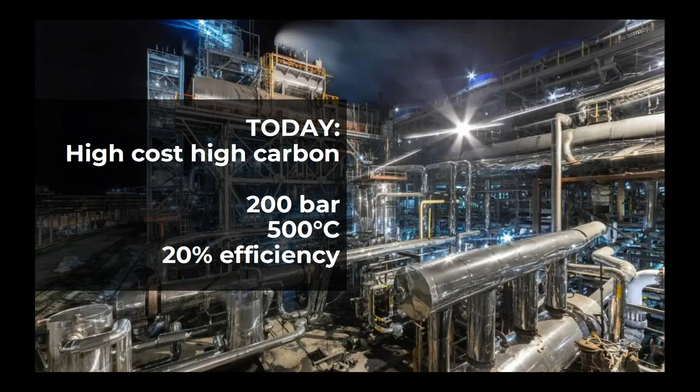But to do that, we need low-cost, low-carbon ammonia. And here's the challenge: today, ammonia is high cost, high carbon. Ammonia is produced in these massive chemical complexes at extremely high pressures and temperatures - 200 bar, 500 degrees Celsius - and a relatively low conversion efficiency of just about 20%.

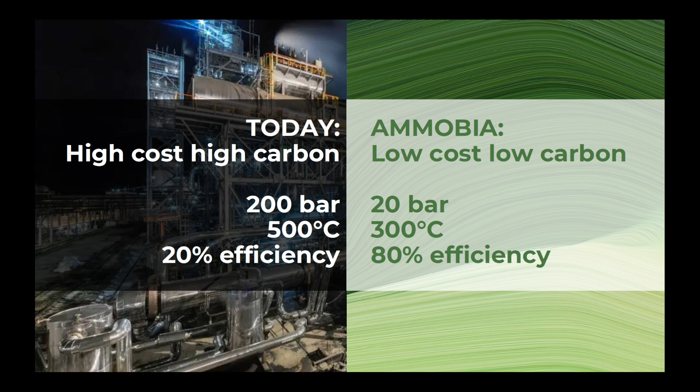Now that's where Ammobia comes in. At Ammobia, we enable low-cost, low-carbon ammonia production. We can produce ammonia at an order of magnitude lower pressure than the conventional process - 20 bar instead of 200 bar - and also significantly lower temperatures, around 300 degrees Celsius instead of the traditional 500. We do all of that while increasing the efficiency from around 20% to 80%.

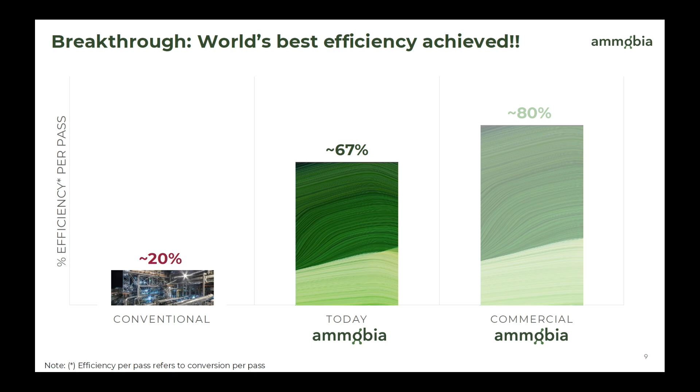I'm excited to share that in our latest reactors, we've actually achieved a big breakthrough. Our long-term goal is 80%. We've already achieved 67% conversion efficiency, which is more than 3 times the conversion efficiency within traditional Haber Bosch. So we're on a path to scale this technology and de-risk it as fast as possible.

Over the last year, we've done a 1,000x scale-up of our tech from a reactor the size of this clicker to a reactor my size.

And now we're doing another big scale-up every year to get our pilot up and running at the end of this year and have a first commercial system up in the field in 2027.

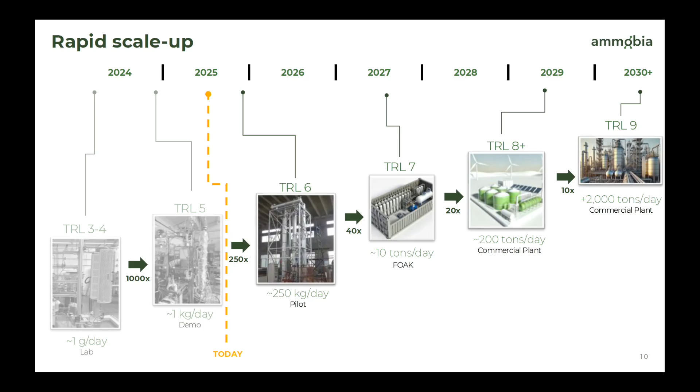The ammonia market is a massive market. If you just capture 10% of the market, you get to a very impressive revenue growth. But the better news is we already have customers lined up to achieve that revenue growth. We're negotiating our first offtake agreements for next year, and we have 5 conditional contracts with customers who want to buy our first commercial units.

The first unit will be a 10-ton-a-day system, kind of like small-scale ammonia production. First customers will be a mix between a few US projects in the US Midwest, where today ammonia is really expensive because it's far from current production in the Gulf Coast, and a second group of projects in Europe, because there's a lot of interest in distributed low-carbon ammonia production there as well.

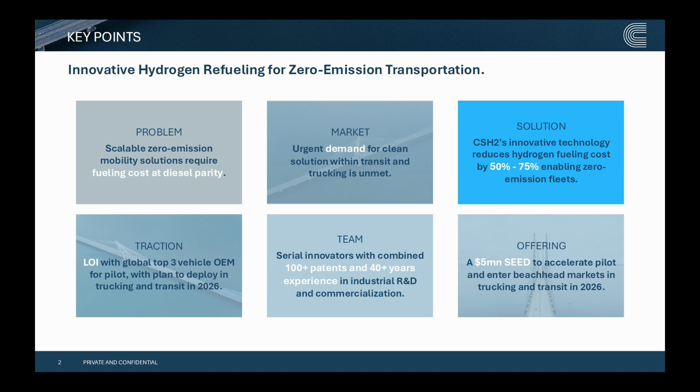And the offering, we plan to open up a seed round in the summer to generate the capital to move forward with the pilot demo and then getting into the market in 2026. So that's my overall story.

What I'd like to do is spend a few minutes to unpack those points. So let me start with why hydrogen. I think this audience is probably already convinced of that, but it's important to recognize that despite advances in battery chemistry and technology and megawatt charging, you still really run into infrastructure problems when you try to scale batteries.

It's things like power outages, the risk of being able to build out grid interconnects in the right amount of time, competing demand from data centers. Those are things that really give pause. There are a lot of people working on innovation in that space, but those are hurdles that need to be overcome if you want to envision an all-battery electric heavy-duty fleet.

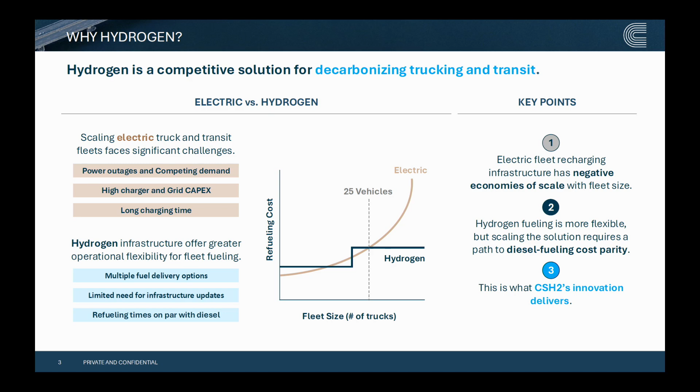Hydrogen, though, has different scaling characteristics, and so it's our view that you can have a very complementary blend of electric and hydrogen. The problem, though, is that hydrogen stations today are too expensive and very inflexible, and that's the problem we're trying to solve.

The rest of it is actually used to capture venting losses and boil-off losses that occur along the way. You don't really need that, except for the fact that if you don't have it, you end up losing so much hydrogen that the economics look even worse than they might be with today's technology. So what we're trying to do ultimately is simplify that technology.

If you can get rid of those, you can eliminate 60% of that station. You can simplify the station, which drives down your CapEx and your OpEx, and then you're on your way down that cost curve, with the potential to really improve the economics. Along the way, you get not only the economics, but efficiency and reliability because you have less equipment, and you also get scalability because you have a smaller station that can start with small fleets and grow into it, rather than overbuilding a station on day one and paying penalties where your station is designed for 200 vehicles, but if you're fueling, say, 30, you end up carrying all that CapEx and fixed costs over too few units of fuel, so you pay a double penalty on that.

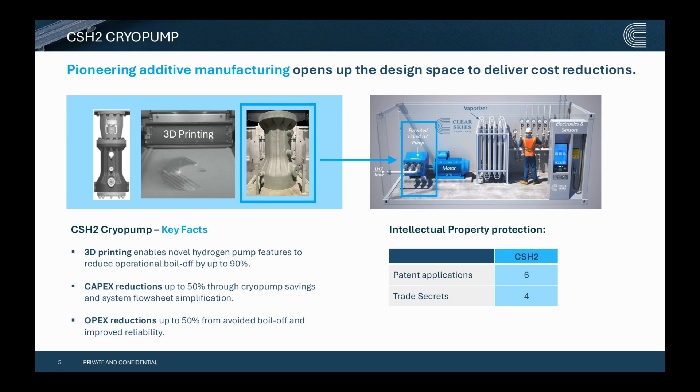Since my co-founder and I both come from industry careers, we understand the value of intellectual property, so we have a deliberate plan to protect it, including 6 patent applications to build a moat, as well as trade secrets around design and operation, which you don't want to patent because those are the secret sauce that really allow you to be differentiated and maintain long-term capability.

When you roll all of that up, what you end up with are mobile refiller modules. What you're looking at here is an artist depiction of a 20 by 10 foot container - that's the station in a box, so it's a much smaller footprint. It's containerized, so if you've got a transit agency starting off with an ultimate fleet of, say, 100 buses, but they only have 10 buses on day one, you can begin with a starter kit and grow into that over time rather than overbuilding your station entirely.

In terms of progress, we've been at this for a bit of time with some early investment from Breakthrough Energy and Mercator Partners. We spent 12 months developing the design and a full-scale prototype, including work here - this took us about 8 iterations to get the printing correct. We are now in the field working through validation, and we expect to have first hydrogen fills within the next couple weeks.

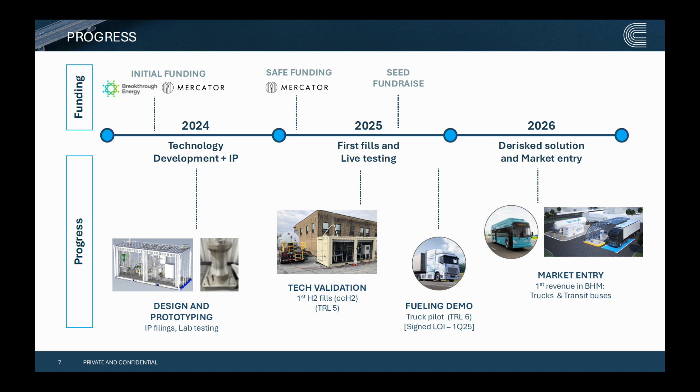On the back of that, we're working with the vehicle OEM I mentioned at the beginning of the presentation to work out the details for a truck filling demo. That demo would involve filling trucks every day, every night, for several weeks. The idea is to get performance data over an extended period, so a transit agency, drayage fleet, or local operator can have confidence that this can actually work reliably. That's what you need to unlock the market, which is what we're trying to do in 2026.

It's a super aggressive schedule. Not one that I think is particularly sane, but it's one we're trying to move forward with. So that's our story. Happy to answer questions, and happy to have you come lift the dumbbell here if you want. Thank you for your attention.

Question: I think it's a general perception that 3D printing as a manufacturing technology is more expensive than more conventional solutions. Do you see any significant cost reduction potential with the process that you're using?

So the short answer is yes. This thing looks heavy and solid, but it's about half the size of the next smallest pump. There are other pumps out there that are about the size of me - actually 7 feet tall is one of the ones out there. So that's one thing, just being able to shrink the size of the material.

The second thing is, because we're building in vacuum chambers, this is a single printed component that took about 48 hours to print. If you made this traditionally, you'd end up with probably 30 components, something much more expensive, a lot of welds, and your thermal insulation wouldn't be anywhere near as good. So there are niche cases where you can use these specific capabilities intelligently, and that's something we've done.

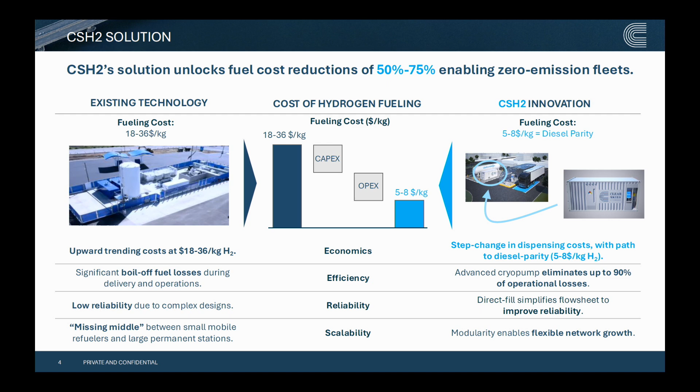If Plug Power is offering you $9 to $10 per kilogram, you're already above diesel parity, so there's a problem. As you scale up, you can do direct contracts with industrial gas companies and start to negotiate that down. You can also activate growth of the market over time to get scaling effects that squeeze the entire cost stack.

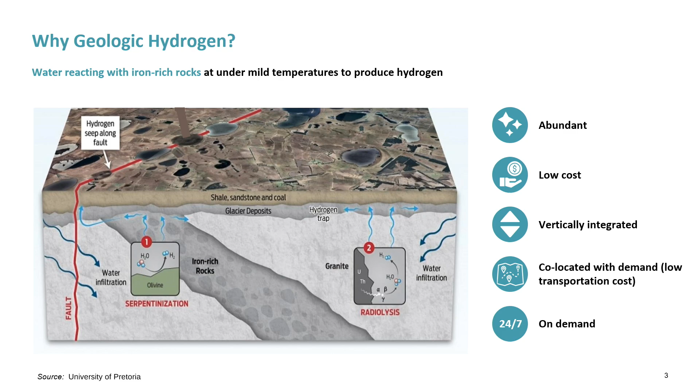Regardless of how it's produced, what we do know is that current projections of how much is produced annually—if we could tap just 1% of that, it would give us about 200 years of abundant, low-cost, on-demand hydrogen. And that's really exciting.

Focusing on probably the most important metric, the cost aspect, we currently have a TEA, which is actually public online—everyone can go see it. It's the culmination of over 150 interviews with hydrogen producers, customers, natural gas well operators, a lot of people. The big takeaway, two big takeaways: one, natural hydrogen can be produced for about $0.50 a kilogram; stimulated, which is the injection of water into these resource rocks to produce it, would be about double that, $1 per kilogram. The second is, of course, this doesn't include transport.

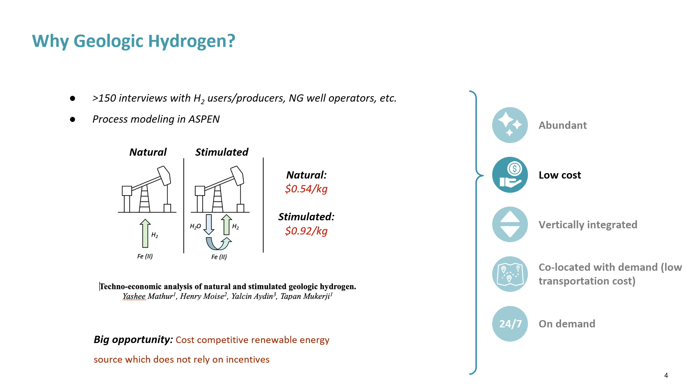The main thing we want to show is that transport is obviously very important, and we want to be able to co-locate these sources next to off-takers. But the biggest opportunity we see from this is that theoretically it's cost competitive without incentives or co-product utilization, like other companies will have to rely on.

Let's talk about some of the people who work in this space. There are a lot of companies right now, and a lot of them are doing great work. The challenge, however, is that most of them rely on historic, legacy well data. One company, for instance, HyTerra, is doing some really exciting stuff in this field. They recently had a press release a few weeks ago—they measured 96% at one of their well sites. It's very exciting, but not that surprising since they're drilling next to a well which already had measured these high hydrogen concentrations. That's not to bash what they're doing; I think what they're doing is great.

It's really just to drive home this message that we don't really know how to find these sites once we've run out of these legacy wells to drill near. And that's what Hydrify wants to work on. So once we run out of these sites, we'll have to resort to wildcatting, which will have very low success rates. And if we use natural gas as a proxy system, you can assume about 5 to 10% success rate when you're actually going out trying to find these sites.

So when you incorporate this, you can spend about $20 to $40 million just for a single viable well when you're doing natural hydrogen. Hydrify, of course, wants to reduce these numbers, and we think we can get it down to about an order of magnitude less, about $2 to $4 million per well. And we want to use our algorithm, which currently, in its current state, can achieve about 50% success rate. We'll talk about it in a little bit—actually this summer, we hope to refine this number even more.

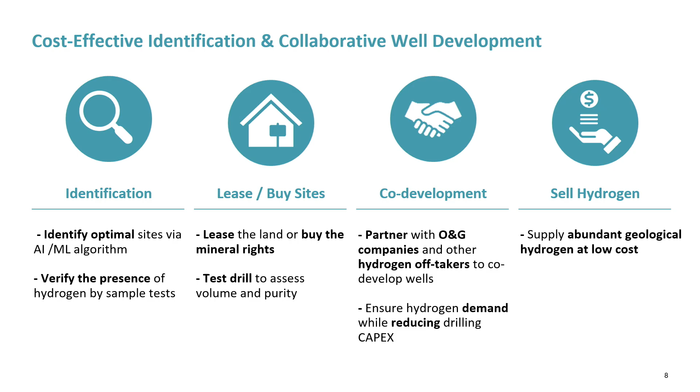Assuming we find the high hydrogen purities that we want, we'll play to our strength and partner with oil and gas companies, hydrogen off-takers, and move from there, because the ideal scenario is to sell hydrogen at low cost and abundance. So we're very interested in partnerships, and with that, I'll leave it up to questions, and thank you for your attention.

I have a question. What is an economically viable hydrogen well? What does that look like? Yeah, let's go back a little bit. Economically viable well means it's producing at $1 per kilogram or less. So we looked at several parameters. Of course, it's a TEA, so it's only as accurate as the inputs you put in. But we base it off of success rate, percent of serpentinization that you can achieve, and distance traveled. So we see $1 per kilogram or less as an economically viable well.

Other questions? Do you plan to lease land without informing any of the big oil and gas majors that this is where natural hydrogen is? Because they would have the capacity to just lease the land and take over it. Right, so right now we're taking advantage of the fact that although oil and gas companies are aware of this, they're not all that interested in it at the moment. So we're going to look for federal lands, BLM lands, and the idea is that if we find these lands, we'll be able to lease them before we release any news about what we find there. That would be the main idea. Yes.

Okay, so I guess most hydrogen that is used today is—is 'reforming hydrogen' the right word? Yeah, okay. What's the delta in price? Because you were saying $1 per kilogram, so what are you beating out? Right, so depending where you are, reforming hydrogen can be anywhere from $1 to $1.50. So when we say we're doing it for about half of that, of course, that's assuming we're not having to transport it off—that's a big thing. So they bring in natural gas and use it on site, so it's probably the key differentiator there. But just for the production at the well, 99+% purity hydrogen, we can do it for about $1 or half a dollar per kilogram.

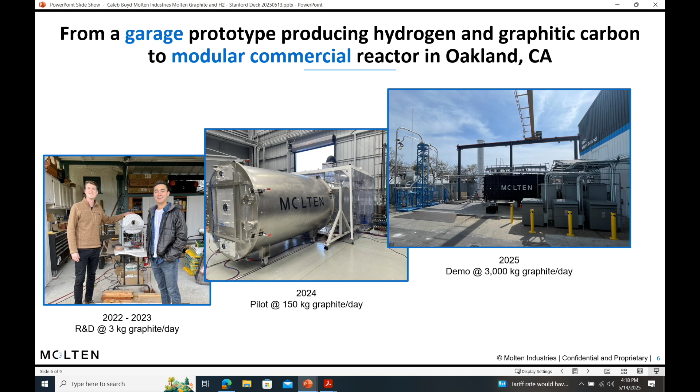We were also backed initially by Union Square Ventures and 50 Years, two amazing funds. Since then, last year, we raised a Series A funding round from Breakthrough Energy Ventures, and we're currently using that to scale up to a modular commercial scale. That's the photo on the very right. That black container module produces 1 ton of hydrogen and 3 tons of graphite a day. We're currently commissioning that unit now, and then looking to site a full-scale commercial plant, which would be 20 of those commercial modular units.

Can't say how much we really are thankful for all the employees that have made this a possibility today. We work with an amazing team, everyone is engineers and technicians. These guys are incredible, the amount of stuff that they are able to build in a short period of time is fantastic. I really want to thank the team and highlight that.

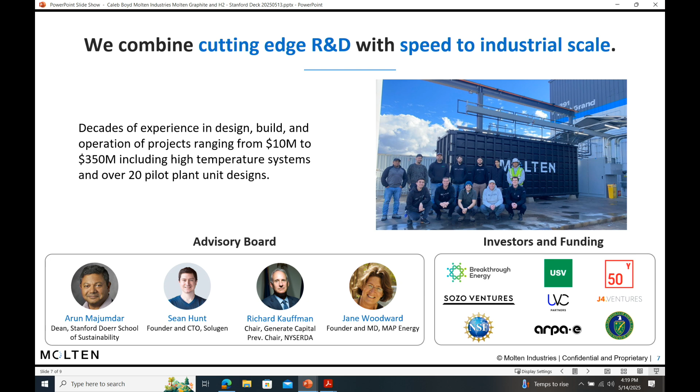We've also got an amazing advisory board, people from the Stanford ecosystem, Arun and Jane specifically. I'm sure many of you guys know them, just huge supporters to almost every company that I know of that's come out of this ecosystem has really benefited from their support. And the investors and funding that we've talked about has been incredibly useful as well.

This is where we're looking to go. So I mentioned that gigafactory, we call it a gigafactory because 20 of those modular units produce enough for 10 gigawatt hours of batteries per year. That's what we're looking to site right now, start construction mid to late 2026, and have commissioning in late 2027, early 2028. So thank you, and I'll open it up for questions.

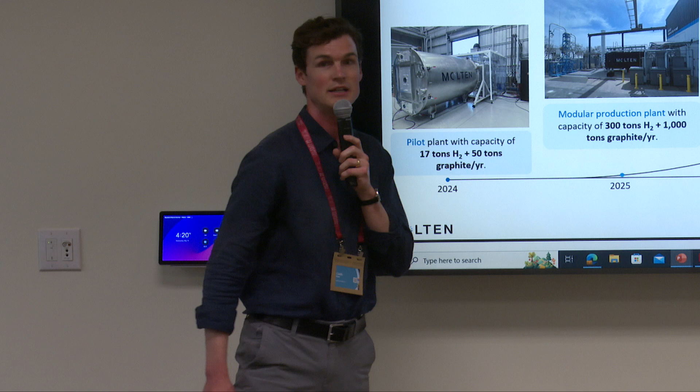On the current scale, what is the cost of hydrogen we're seeing without including the selling price of graphite? At this scale, this modular production plant right now in Oakland, it's really expensive. We pay something like $15 per million BTU of natural gas, and at peak we're paying around 50 cents a kilowatt hour of electricity. Stuff is expensive in Oakland, so the hydrogen here is very expensive. At this first gigafactory, we're looking to sell that hydrogen between $1 to $1.50 per kilogram, and at full scale, we think we can get to below $1 per kilogram.

We talked earlier about hydrogen today coming mainly from natural gas through steam methane reforming, which costs around $1 a kilogram, not necessarily counting depreciated capex. With depreciated plants, you can potentially get lower than $1 a kilogram. If you start to look at actually replacing natural gas, for example in a DRI shaft furnace to make clean steel, you need about 70 cents a kilogram to be economical with existing DRI shaft furnaces. And if you're looking to replace natural gas on just a per million BTU basis, like straight heating natural gas going into a burner, you need about 50 cents a kilogram hydrogen cost. Those are the prices we would love to target in the long term, but that's difficult to do.

What's the carbon intensity of the hydrogen at the end of the process? Yeah, good question. It depends on how you count it.

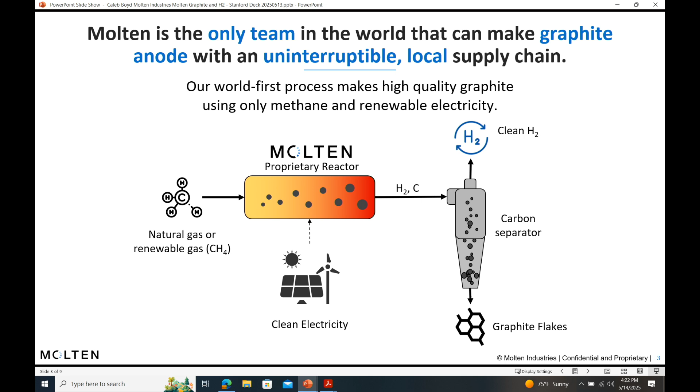The primary source of emissions in our process is upstream methane emissions. If we're using clean electricity, our process itself generates no CO2 emissions. Natural gas has upstream methane leaks, so that's the primary source of emissions in our process. If you push all those emissions to the hydrogen, you're looking at around 1 to 1.5 kilograms of CO2 per kilogram of hydrogen if you're using 100% renewable electricity.

The interesting thing is that if you look at, for example, the 45V tax credit, which may or may not exist shortly, the graphite flakes that we produce are much lower carbon intensity than the way graphite's made today. That's primarily because you're doing either strip mining or this process at 3,000 Celsius, which has a ton of NOx and SOx and methane emissions as well. And you actually get a credit for that.

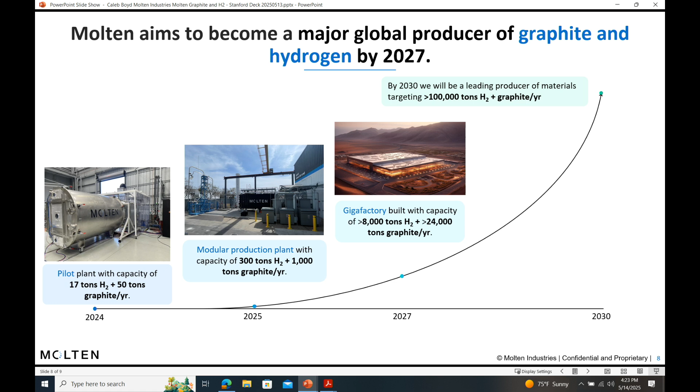From the 45V tax credit standpoint, the way it's written today, we're actually eligible for the $3 per kilogram credit because of that co-product allocation. As it's written right now in the reconciliation bill, 45V would still exist if we just start this facility construction in 2025. So you can either look at that as a bad thing, or maybe we just need to raise funding sooner and start facility construction sooner.

Are there any entities that could be off-takers for both the hydrogen as well as the graphite, since natural gas pipelines are everywhere, so why not move it around? Yeah, that's a good question.

Some entities have been interested in that, like steel companies use graphite for anodes for electric arc furnaces. They would also be interested in using hydrogen. The graphite we make, which is basically a powder, these flakes, hasn't been shown to work in steel electrodes yet—it would be like a research project. Most battery companies don't use large quantities of hydrogen, so we've been seeing this as two different end customer processes. If we're making electricity, then we could supply electricity to those battery companies with the hydrogen. It's just a low value use case for the hydrogen, but yeah.

So in the color spectrum of hydrogen? Technically, it's turquoise hydrogen. It's basically blue. You can think about it as like we're taking a fossil fuel, and instead of having to dump CO2 into the ground, we sequester that as graphite. Most people don't burn their batteries intentionally, so the graphite is sequestered most of the time.

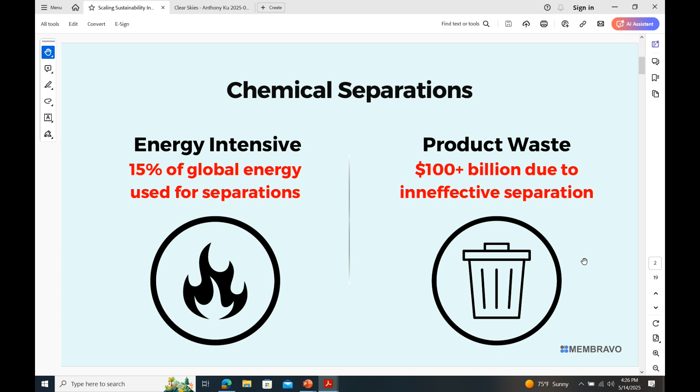At the same time, chemical separations alone are the source of a tremendous amount of energy and product waste in the industry. 15% of global energy and emissions goes to just taking mixtures of molecules and separating them. It's remarkable. Hundreds of billions of dollars of product that we've made go to waste because they can't be separated from the stuff they're mixed with due to ineffective separation technologies.

So I'll give you an example with this nice little cartoon. Tens of billions of dollars of hydrogen go to waste every year because existing technologies are not durable enough to separate that hydrogen from high temperature, harsh gas mixtures that exist in the industry. Therefore, companies have no choice but to burn that gas. This has been taking place for decades, and there's not much to do about it.

We solve this problem by simply recovering hydrogen out of those waste mixtures, allowing that value to be brought back into the asset, reducing emissions and reducing cost. We actually work in a variety of different applications across industries, but today we're gonna talk mostly about hydrogen.

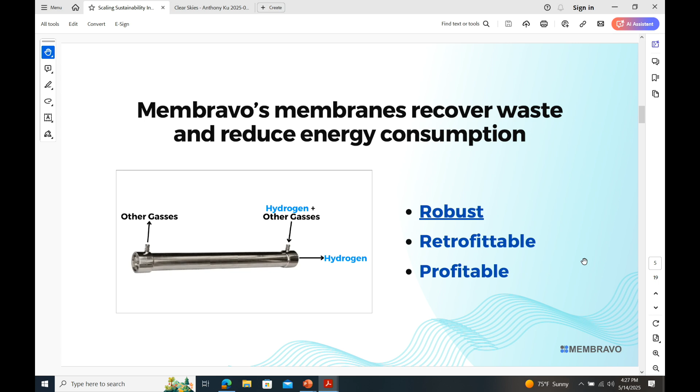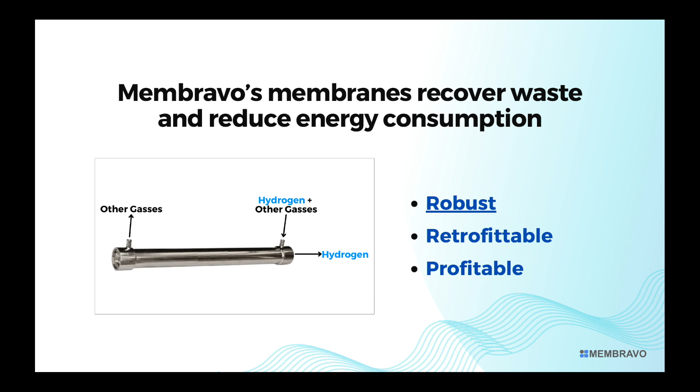Our membranes work like filters. They allow hydrogen to pass through and they block other gases. Unlike existing hydrogen separation technologies, ours is designed and field tested specifically to work in the most extreme industrial environments. Our product also works for our customers because it's easily retrofittable into existing assets, and it's profitable for them to use, so there's no need for subsidies or incentives.

Again, my name is Joe Sawa. I'm the co-founder and CEO of Membravo. I spent more than a decade at Shell working in oil and gas and hydrogen, and I started Membravo to help decarbonize industries exactly like those. My co-founder Milad Yavari is a PhD in membrane technology, and he led the development of our technology at SRI, and we joined forces to bring this technology to market very quickly and very effectively.

We just got started. We launched the company in January 2025 when we spun out from SRI. We have manufacturing and headquarters in Menlo Park. To date, we've raised $250,000, and we've joined a couple exciting accelerators, Third Derivative and Plug and Play. We just heard, just yesterday actually, that we've been accepted to an amazing program, an amazing accelerator. I can't share what that is yet, but stay tuned.

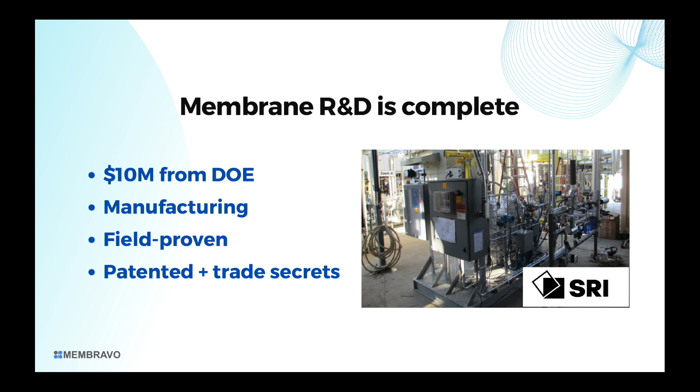More than $10 million of U.S. Department of Energy funding went into the development of our technology at SRI, which, by the way, used to be called Stanford Research Institute, right down the street in Menlo Park, where they perfected the manufacturing process for this technology, and they also field tested the technology at third-party locations, including the National Carbon Capture Center, where our membrane separated hydrogen from high-temperature syngas, which is a really challenging industrial separation, and it's also how 99% of hydrogen is made today. The technology is patented, and there are additional trade secrets and confidential know-how that ensure that the tech can't be reverse engineered.

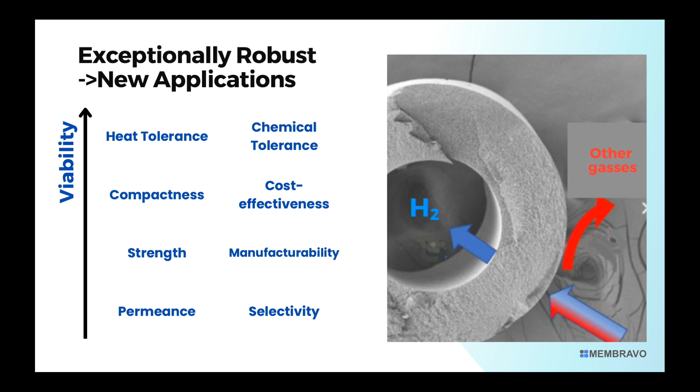Our membranes are exceptionally robust, which means that they work in applications where other technologies don't. We can capture value, we can reduce waste in these new applications. Typically, we see, coming out of R&D, that researchers are looking for materials and membranes that have high permeance and selectivity, but then they have to prove that the materials are strong and manufacturable. Then they have to make sure that they're compact and cost-effective, and sometimes those materials get commercialized, and that's what we see in industry today. But they're really lacking the top part, which is the heat tolerance and the chemical tolerance, which means that their applicability in all the variety of industries where hydrogen separation is needed is very limited. There's just a lot of applications that can't be served, a lot of unaddressed need with this technology.

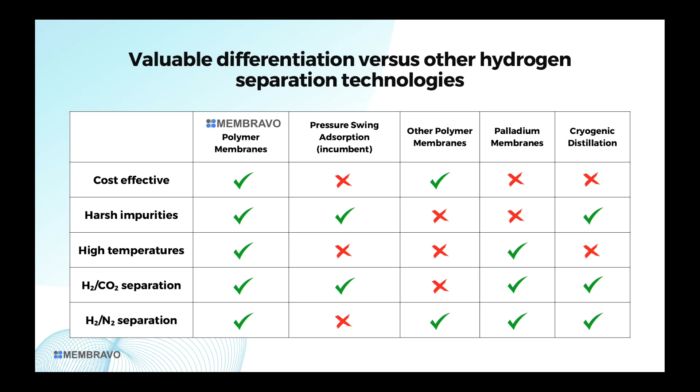If we scan the landscape between pressure swing adsorption, these are competitive technologies. Pressure swing adsorption is the incumbent technology. There are other polymer membranes as well as palladium membranes and cryogenic distillation, but it's really the combination of the cost effectiveness, the resilience to impurities and temperature, and the ability just to get the job done, to do the separation that's needed between hydrogen and other gases. We're critically positioned to serve lots of these unserved markets because of the shortcomings in the existing technologies and the strengths of ours. So our membranes add value in really a wide range of applications.

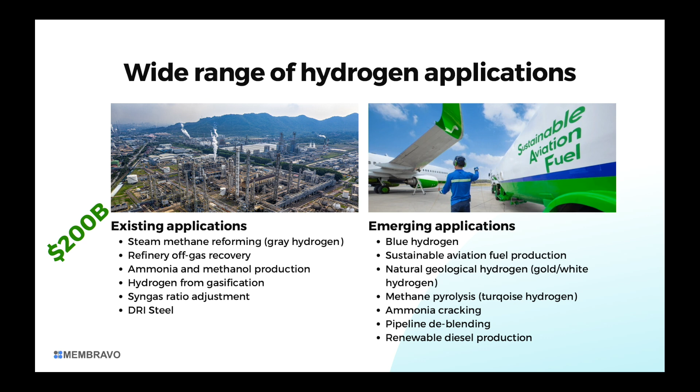Those are in industry today, in refineries, chemical plants, and DRI steel mills especially. $200 billion worth of hydrogen is used every year today, and tens of billions go to waste. We're also looking at the exciting emerging applications that we're hearing about today, where there's new ways of producing, consuming, transporting, and storing hydrogen. Many of them can be made more efficient through better separation. So that's blue hydrogen, methane pyrolysis, natural hydrogen, ammonia cracking, renewable diesel production, sustainable aviation fuel production. It's really a long list. Virtually everywhere that hydrogen is produced, consumed, stored, or transported, we're finding value from these membranes.

Just a quick example: gray hydrogen or blue hydrogen is made from steam methane reforming today. It's separated via technology called pressure swing adsorption, but about 20% of hydrogen goes to waste just due to the ineffective nature of that separation technology. By retrofitting our membranes onto that unit, we can simply capture hydrogen that's coming out of that waste stream, recycle it back into the process, and thereby increase production of that process by 20% with no change to the inputs, no change to the fossil fuel inputs. So that's an improvement in efficiency, reduction of carbon emissions, and obviously a big boost to the economics for that project or for that asset.

Briefly, looking beyond hydrogen, we do serve other markets that deal with high temperatures and harsh chemical mixtures. In fact, our first customer—we shipped product and received revenue from our first customer a couple months after spinning out—was in the semiconductor industry. That's a liquid separation we're currently piloting.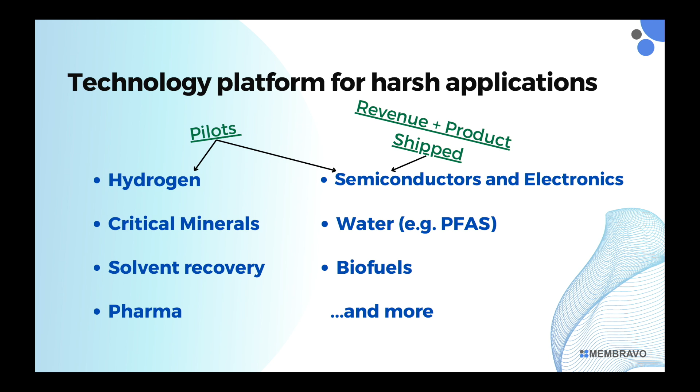But really, hydrogen has been the largest interest we've gathered thus far. There are lots of other applications to explore going forward as well, in parallel.

So we're here at the bottom, doing small-scale pilots with our first paying customer. Through the rest of 2025, we'll be scaling up our product to build larger modules. Going into the end of 2025 and start of 2026, we'll begin pilot testing with our first customer. After that pilot test is complete, we expect commercial purchase orders, and then our challenge becomes scaling up to meet the demand we've generated.

We're currently raising a $2 million pre-seed round to prepare for and start executing those pilot projects. That means hiring our core team and engineering that commercial-scale product. We're extremely confident in our technology, product, and business overall, even in this environment and landscape, because we have strong unit economics today that work in any policy scenario, and we have a very short path to profitability and scale-up.

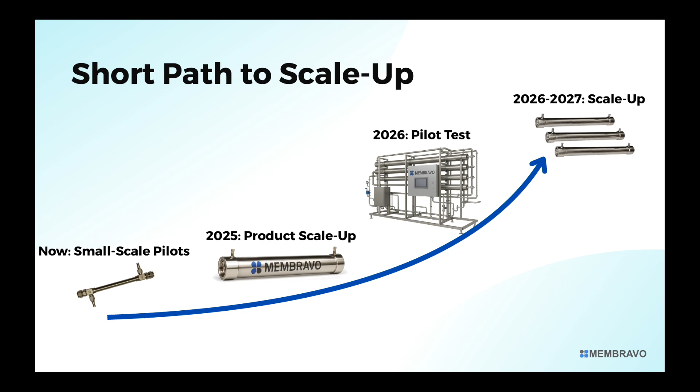Sure, so our minimum commercial scale that we're talking about is nominally 200 kilograms per day capacity, about 3 feet long and 4 inches in diameter. There's no reason we can't go bigger in the future, but that's what we're calling minimum. We can manufacture at that scale and build more units, putting them in parallel to get more throughput based on the customer system. Long term, we can always make that bigger and get more throughput as well.

Could you replace the pressure swing adsorption unit altogether? It depends on the process. We envision a few different scenarios. In some cases, we can replace the PSA.

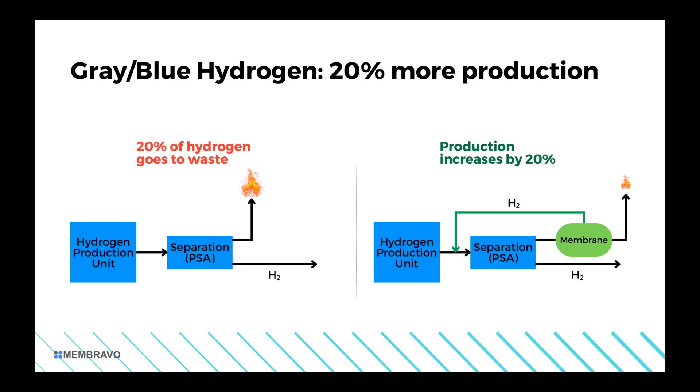In many cases, like I showed here, we actually work really well as a hybrid system. A PSA today achieves really high purity, meeting the customer's requirements fairly well, but with low recovery. This 20% loss is incredibly high. By making a hybrid system, PSA plus membranes, we can keep that high purity but also boost that recovery to something much more reasonable. In some cases we could replace it entirely, but the hybrid system makes sense a lot of times.

That's great for us because there are many, many units that need retrofits. We don't have to tear out the old unit and put in a new one, we can just complement what's already there.

How does your pricing compare to competitors? We are in the same price range as existing competitors that have less durable technology. We're in the same ballpark, nothing out of the ordinary for customers, but they can use this product in places where they can't use other technologies.

I'm curious if this has good application for electrolysis and wet hydrogen, like separating gas and liquid, or is it mostly for gas separation? We are seeing a little bit less traction in that space, to be totally honest. It's sort of already solved, and deoxy units are there to remove trace impurities. The industry seems fairly happy with the solutions that are there, so I'll never say never, but we're not looking there first.

All right, thank you so much.

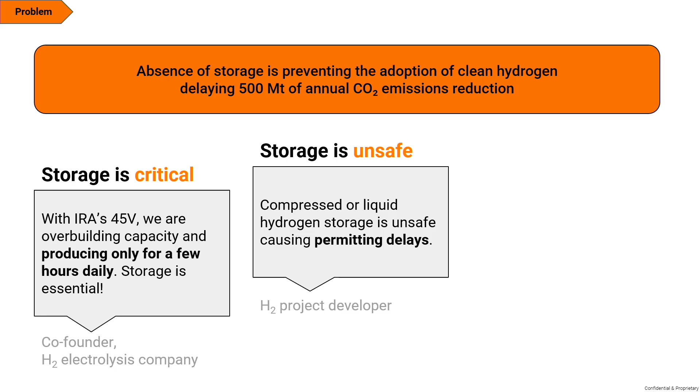Secondly, with hydrogen storage, we talked a bit about off-gassing earlier, and there's also a perception around storing hydrogen in compressed form, which causes a lot of permitting delays. So safety is an important factor. And lastly, it is expensive.

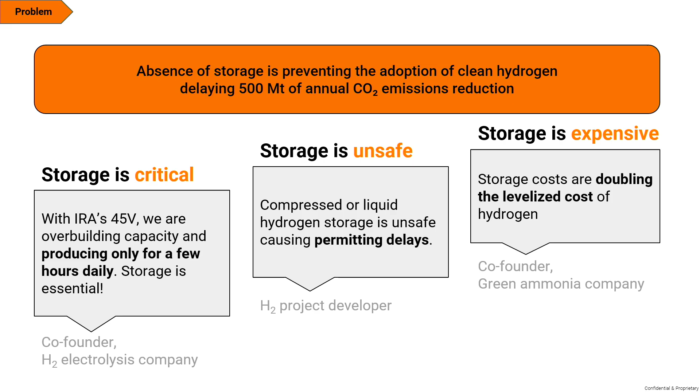In many cases, hydrogen storage is as expensive or even more expensive than the cost of production itself, in the range of $3 to $5 per kg, which is ridiculous. When you look at the overall cost of either green or low carbon hydrogen production, many of these projects become unviable. We started early last year through a Stanford Climate Ventures class.

I am Suhani, a second year MBA student, and after speaking to almost 200 people in the industry, we realized there are two different types of storage needs: one is buffer, and the other is backup.

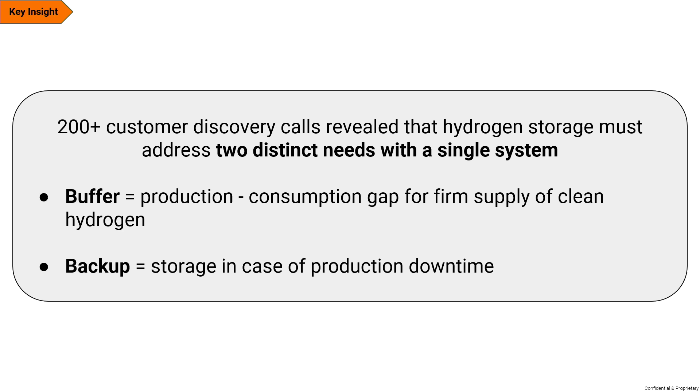Just for context, when you look at battery-based storage for electrons, there's long duration storage with a different chemistry, and short duration storage. It's the same with hydrogen. On a daily basis, you need buffering if you're using green hydrogen production, and you also need backup in case your production unit isn't working for a few days, similar to power backups, where you need infrequent charging and discharging of hydrogen solutions.

So we looked at various different solutions and came across metal hydrides, a technology that has been researched for almost 20 years by the Department of Energy, with billions of dollars spent on research, producing a lot of good material. Incidentally, my mother had also worked on this technology about 10 years ago and had commercialized a plant in India.

But having said that, why did this technology not scale, and why do we only see compressed or cryogenic storage so far? It's because a lot of people were trying to use this technology for mobility and transportation applications. And by logic, metals are heavy and they add to the weight and reduce the efficiency overall.

So despite being significantly safer because hydrogen is stored at almost room temperature and pressure, the OPEX is really low. It's almost like a hydride gets formed and you don't need to maintain anything. It can stay like that for long durations, and has probably one of the best volumetric storage capacities.

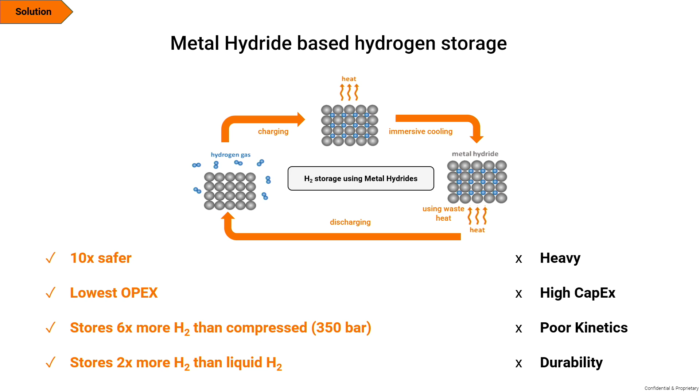You can store 2x more than liquid hydrogen as well. But there were visible gaps. Also, the most viable metal hydride solutions, which are titanium-based, are very high capex. And there were questions in the industry about kinetics as well as durability. So when we looked at the solution, there were a lot of very good check marks, but a lot of issues as well. And that's where our innovation comes in at Nasadia.

We have looked at combining two different alloys together, the two concepts of buffer and backup that I talked about. So there are two separate types of alloys that we're using. One is titanium-based, which is expensive but has the best kinetics, so this is for your daily buffering. And then a magnesium-based one, which is low cost and reduces your overall system capex significantly. But that's only triggered when you need huge quantities of hydrogen out.

By doing this, we have effectively reduced the overall weight. We have reduced the capex, which becomes a big challenge in terms of new installations, as well as improved kinetics and durability.

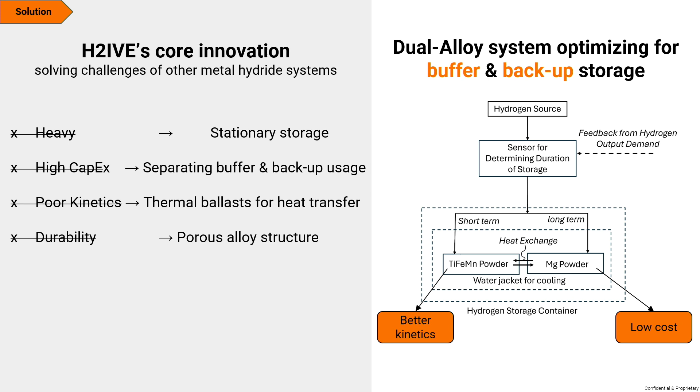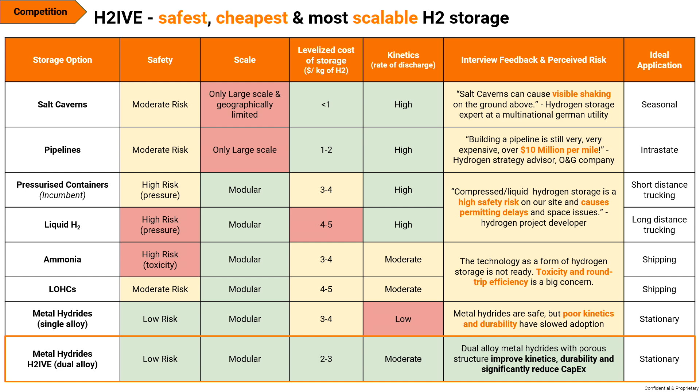When we compare it to other types of storage solutions, there are many options, but either they are geographically limited, like salt caverns, which are probably the cheapest but not available everywhere. Then there's liquid storage solutions, which we talked about a lot. There are new ways of storing hydrogen as different chemicals like ammonia or LOHCs. But metal hydrides using dual alloys is probably one of the best solutions when you look at stationary storage and not moving the metal around.

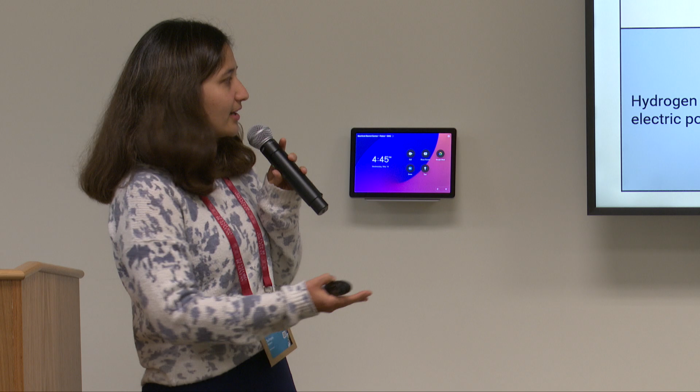Now the big question arises: how big is the market, and is green hydrogen really going to take off or not? We see that there are two separate markets broadly to categorize the need for hydrogen. One is where hydrogen is competing with electrons for power backup, data centers, and replacing diesel generators.

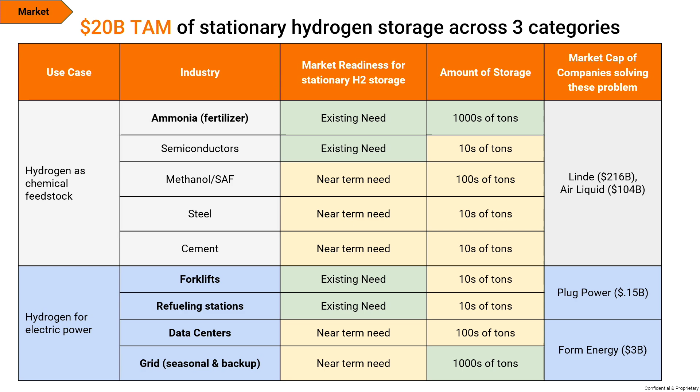But there's a very huge segment where hydrogen is used as a feedstock in ammonia, methanol, SAF, and specialty chemicals, and also in steel and cement industries. That is where there is a lot more stationary storage requirement, and we are, at least from our beachhead market perspective, capturing some of those segments.

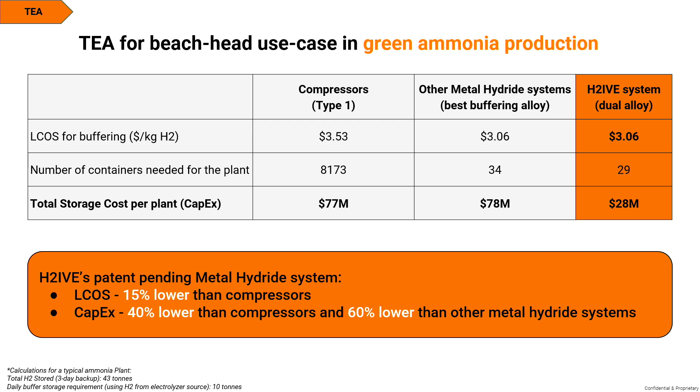We did one analysis from a TEA perspective, looking at how the cost compares with the incumbent, which is compressors, which most people are used to using. There's almost a 15% lower LCOS on the overall levelized basis, as well as capex that's 40% cheaper than compressors. This is because of the engineering on combining two different types of alloys, and we're able to bring the cost down significantly because magnesium is really cheap.

In terms of how we want to scale this, this is a capex solution. We would, just like selling batteries, sell these solutions to industries, and eventually also look at system integration. We can do it on both ends.

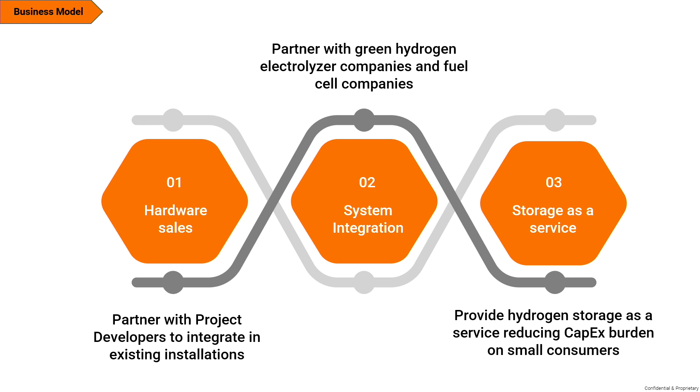One is hydrogen producers, either green hydrogen or different forms of low carbon hydrogen production methods. And then there's a consumer. And there are people in between who are project developers. Right now, we are seeing a lot more interest coming in from project developers because storage is on top of their mind, but we see integration coming in from both sides as well.

Lastly, from our team: Chaitanya was a master's student. He graduated last year from Stanford and has looked at green hydrogen as well as storage for the last 5 years. I'm doing my MBA at Stanford, and prior to this, I was a hardware entrepreneur working in a different industry, but also scaled it to 13 different countries. So I have real experience and pain of building hardware technologies, and also appreciation of doing that.

Naomi is here, who has been a mentor from the beginning, and Dr.

Mark Allendorf, who has worked in metal hydrides for 20 years at DOE, is also our advisor. In terms of stage, we are fairly early. We started last year as a student team, raised almost 100K over the last year to develop our prototype, which is right now being developed in India. Over the next few months, once we have results of our lab-based testing of the dual alloy system and how we are optimizing it, we intend to raise about a 2.5 million seed round. Thank you, everyone.